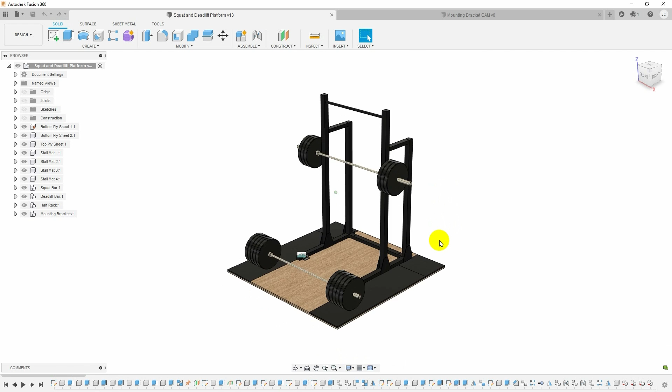I think everything in life worth doing starts with a CAD model, and that includes a squat rack and deadlift platform. So this is what I'm building, a Rogue half rack. I've got illustrations of a loaded squat bar and a loaded deadlift bar just to get an idea of how all this stuff was going to fit when designing the platform.

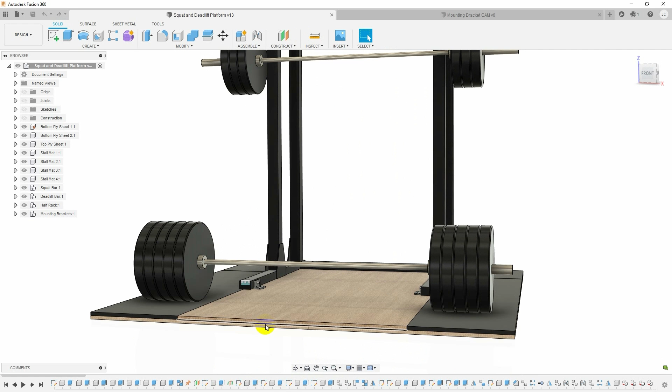The platform underneath consists of 3 sheets of 3/4 inch plywood: a couple sheets for the base, and a finished sheet to stand on that's 4 feet wide, with strips of horse stall mat on the sides to drop the deadlift on without damaging the floor. Gives it a little cushioning.

I'm going to be building this in the garage on the concrete floor, and all of this is going to be screwed together, but I need a way to anchor the squat rack down to the platform so it won't move when I walk out a heavy squat or rack a heavy bench. So I need a way to attach it to the floor.

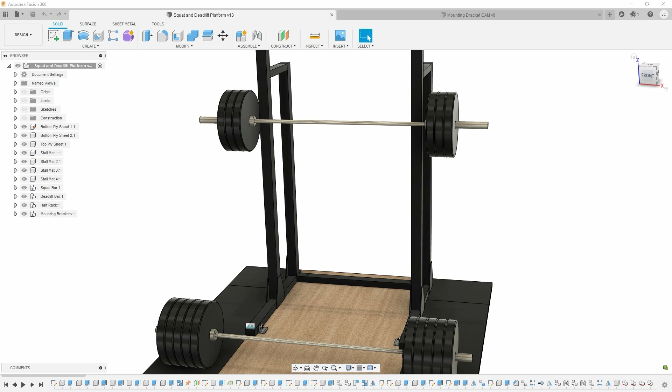Rogue actually makes a mounting foot, and this is the one they sell. It's just a piece of bent 3/16 steel that bolts into 2 of the holes using 5/8 bolts that bolt into the foot and provide a place to put in a concrete anchor.

But I'm not planning on anchoring this to the concrete. I'm planning on anchoring it down to the wood platform, which is only about 1.5 inches thick. I just can't imagine a 1/2 inch or 3/8 inch lag screw going into a 1.5 inch thick piece of wood - that doesn't seem viable. So I wanted to design my own foot that used an array of small wood screws to hold it down to the platform, and that's exactly what this is.

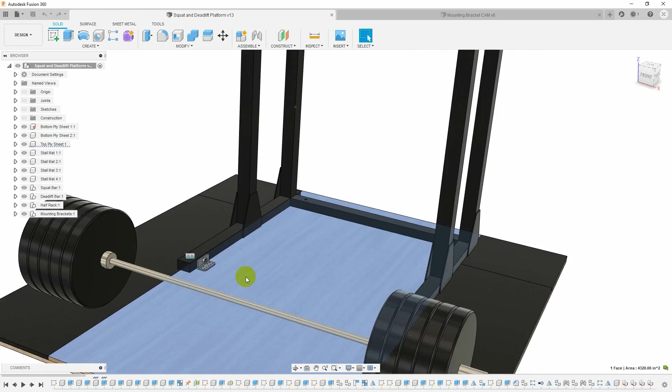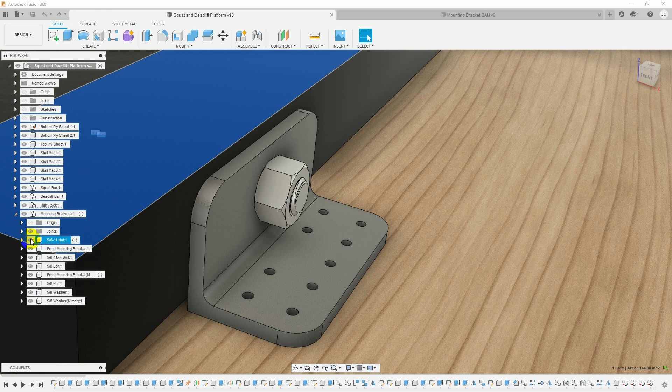This is a bracket I designed. It's got holes for a number of screws - I'll use 1.25 inch drywall screws to hold this bracket down to the platform. Then it'll bolt through one of the normal holes in the foot with a 5/8 bolt. If we hide the nut and bolt, you can get an idea of how this fits. It's made from a piece of 2-inch angle iron, or 2-inch angled aluminum, which is what I'm going to mill it out of.

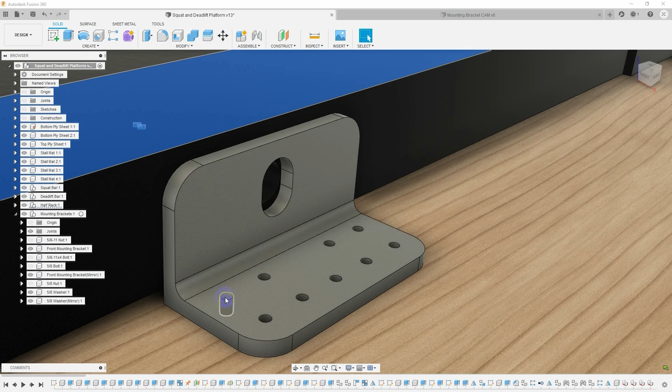It's already got this radius in it, and the bulk shape is there, so we don't have to hog out a bunch of material. We just need to cut a slot here because I don't know exactly how high this is going to be, and if you can't make something perfect, you make it adjustable. So I'm going to make the height adjustable, and then once it's bolted in place and flush with the ground, I'll drive in 9 screws to hold it.

To machine this, we're just going to need to pocket that out, do the perimeter, and then put it in a second setup to drill all the holes and contour around the other side. So I have a model here for the CAM, and this is going to be pretty straightforward.

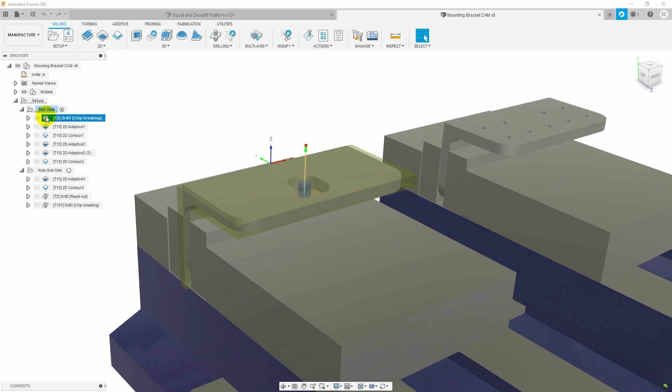Before I pocket out this slot, I want to go ahead and drill. Using this new spindle, I'm not that familiar with how a helical entry is going to work, so I'm going to use my spotting drill and put in a 1/4 inch hole first to make room, so there'll be less pressure on the helical entry, and we'll see how it goes.

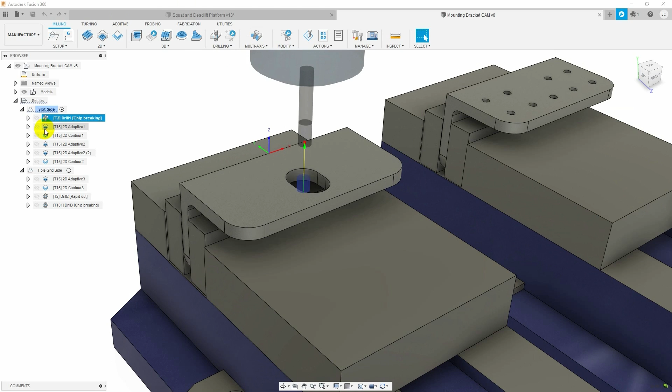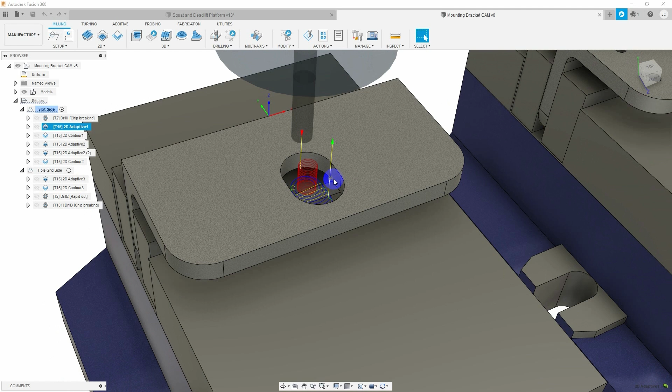Maybe in the long run I won't need to do that. We'll do a 2D adaptive with a helical entry. There's already a pre-drilled hole, and it will accelerate and hog out the rest of that material. This will be the first time we see this spindle running full speed, at 54 inches a minute at 12,000 RPM with a 3-flute cutter hogging out material. I'm hoping that's going to be pretty spectacular, but not too spectacular, if you know what I mean.

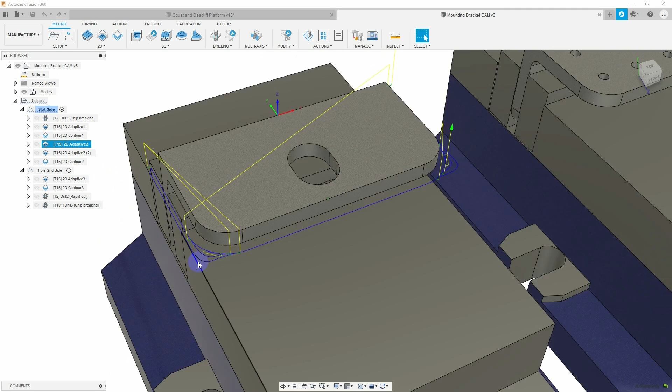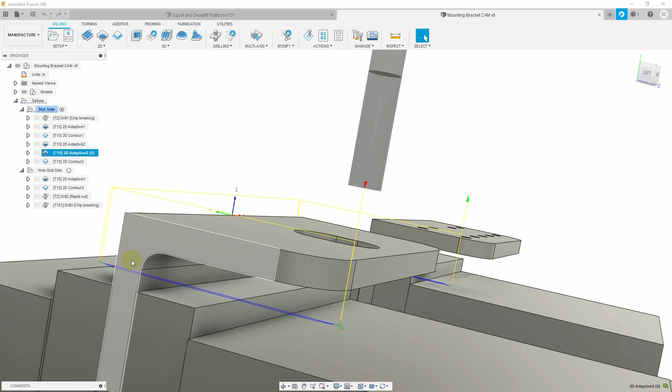Then there's a contour, because the adaptive is going to leave about 10 thou, and I'll do a contour to clean up any facets left from the adaptive clearing. Then we'll do an adaptive clearing operation on the outside, just coming through the quarter inch thickness, to contour it around. Then a second adaptive deeper, because the end mill is only meant to side mill down 1 diameter, and I want to go about 2 diameters so we take care of this filleted area and get it trimmed to width, so when we flip it around in the other setup we can just do 1 pass to clean up the other quarter inch thick flange. Then a final contour at full depth around the outside to smooth it out and clean it up.

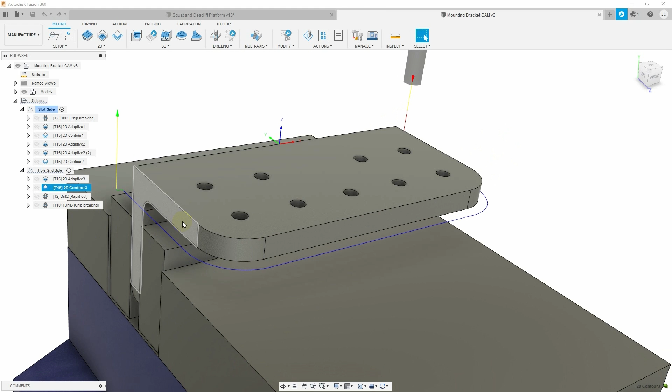Then we'll take that out, flip it over into a second setup, and do the same kind of adaptive operation, except we only need to do it at 1 depth because the rest has already been cleaned up. Then contour around the outside to clean that up, and I'll spot drill and drill all of the holes. Now I probably don't need to spot drill this because it's not that critical, but the tool changes are quick, so I'm going to go ahead and do it and just get some experience with this new spindle and how it behaves. I'll probably want some countersinks on the bottom side of this.

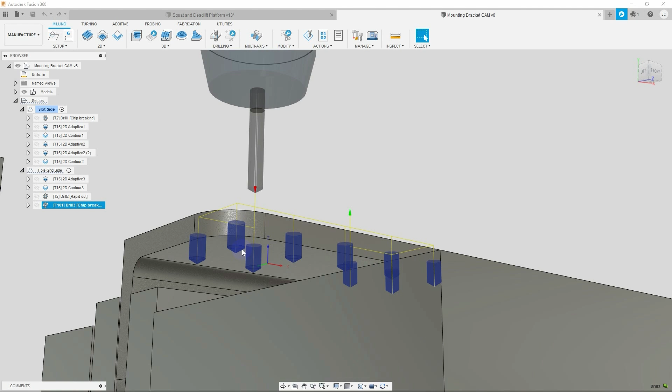I'm not going to try to mill those. I'll just run it over to the drill press and do those by hand. So I think that's it. Let's go out to the mill and see how this goes.

This is the material we're going to use. It's just a 2 inch by 2 inch piece of aluminum angle extruded with quarter inch thick sides.

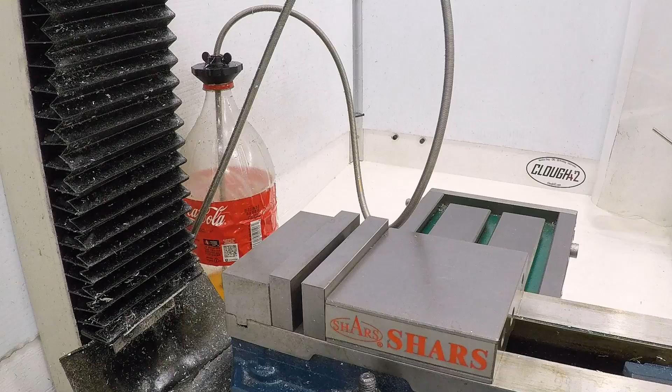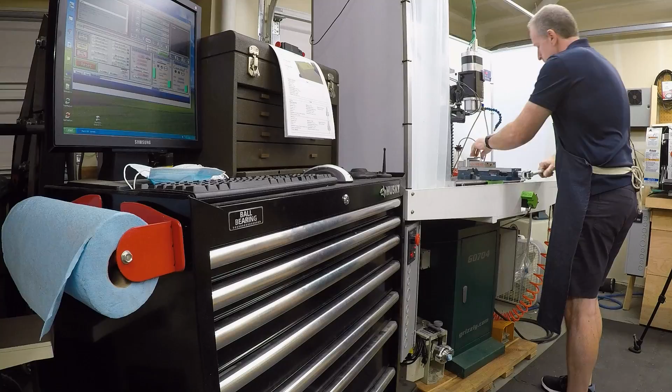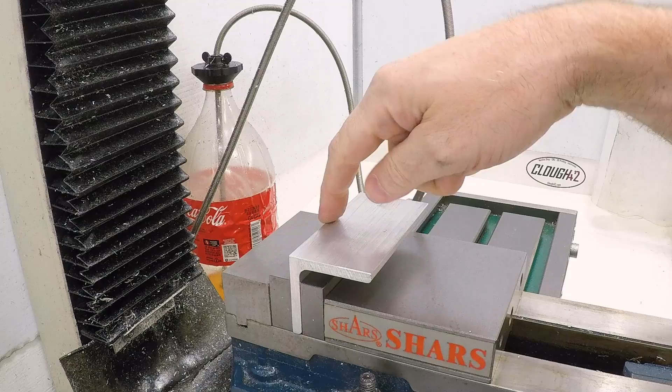I'll drop that in the vise, center it up, though it really doesn't matter, and clamp it down firmly. The first side we're going to do is the side that has the slot in it, but the first thing we need to do is zero up on this back edge of the part as shown in the setup sheet. And for that, we will need the Haimer.

Okay, according to the setup sheet, the first tool is going to be a spotting drill, tool 2. We're just going to use the spotting drill to create an opening for the helix entry. Do we really need to? Probably not, but I'm still getting the hang of this spindle and getting a feeling for what it can do, and I'd rather have a clearance hole just to make the entry easier.

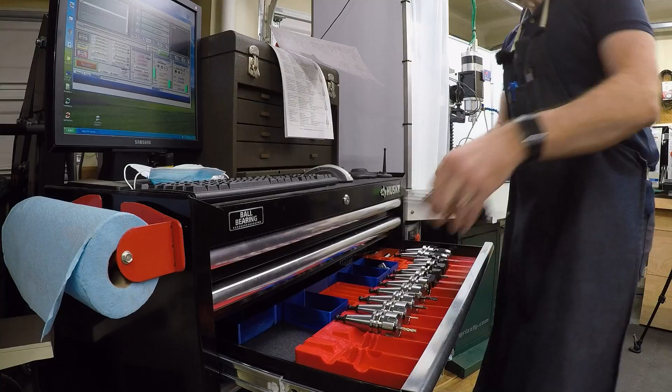Okay, and then the rest of this program is going to be tool 15, which is a 3-flute end mill. This is a Lakeshore Carbide quarter inch variable flute end mill coated for aluminum.

Now this thing is going to move really, really fast, and it's a little bit weakly supported because we're just dealing with the rigidity of the aluminum here. I think it's going to be okay for this particular cut, just because the loading is not that great. We're only taking 1.5 thou per tooth, and with this running at 12,000 RPM with the variable flute end mill, I think it's all going to even out and run pretty smoothly, even though we have a little bit of a lack of rigidity. But I guess we're going to find out. Let me close part of this. I can't close it completely or you won't be able to see, but I'm expecting just a snowstorm of aluminum from this.

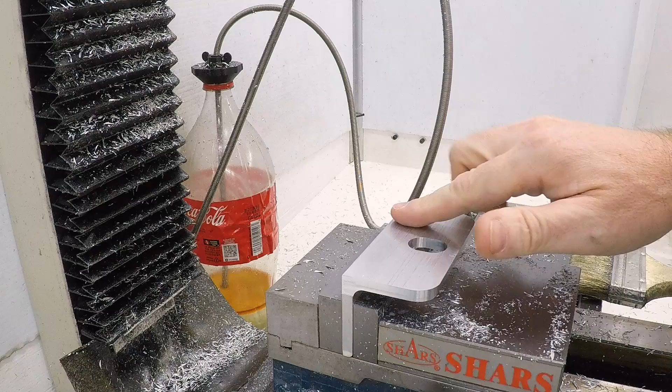Well, that went pretty well. The surface finish on that is very, very nice. And yes, there was a snowstorm of aluminum. Looks like I caught most of it inside the enclosure, but there's a little bit out here on the floor. It's okay, I'll vacuum it up later. It was worth it to get the shot.

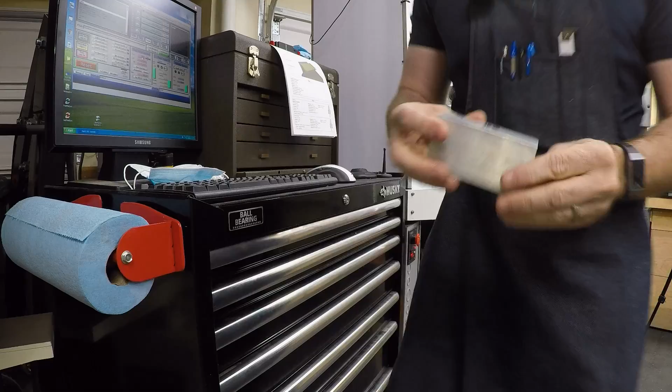Okay, that all came out nice and clean. I'm pretty happy with that. You can see we cleaned up this side all the way back to the base here and down, so we cleaned up that corner. So then when we flip it to do the drilling in this direction, it'll give us a nice place that we can indicate. Let me wipe the chips off this and knock off any burrs, and let's put this back in the vise.

Now we need exactly the same drill. Let me grab the Haimer and we'll find this back edge. We don't need to re-indicate the Y because that's controlled by the fixed jaw of the vise, but because we took the part out and put it back in, we will need to indicate the X, and I'll use these machine surfaces on the end to do that.

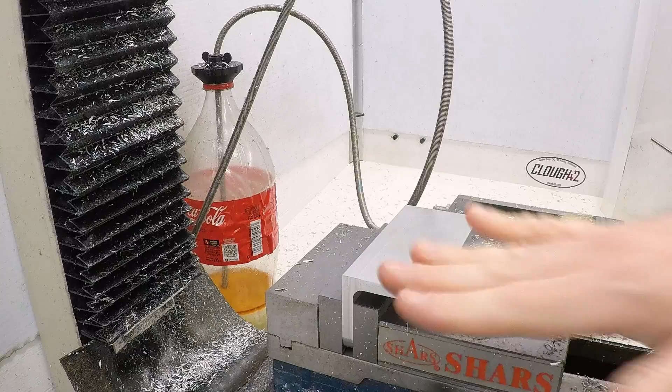And as long as I've got the Haimer in there, I'll go ahead and re-indicate Z. Should be exactly the same. No, it won't, because we took a little bit off of this front edge, which is now on the bottom of the vise, so the Z height will be a little bit different, even if you aren't accounting for the differences in the extrusion.

Yeah, and just out of curiosity, the Z0 I'm showing here is 0.0049. So we did take about 5 thou off of the other side of the part, which is why the Z is now about 5 thou lower.

Okay, the first operation is back to tool 15, to contour adaptive and contour the outside edge.

Next up is the spotting drill, to spot the holes.

And now finally a number 15 drill.

Get this drill out of the way so I don't cut myself on it. Of course, that's never happened before. And let's take a look at what we got.

Those look like holes. Got a little bit of an edge on here. Let's see, how do we do for alignment between the top and bottom, between the two setups? I can see the joint there. I can see this, the edge.

I can see when I came across this last time, I touched both surfaces. There is something there, might be a thou, might be two. It's hard to tell. And on this side, it's the other direction, and yeah, it's pretty similar, a thou or two, probably misalignment. That's not too bad. I can live with that on a part like this.

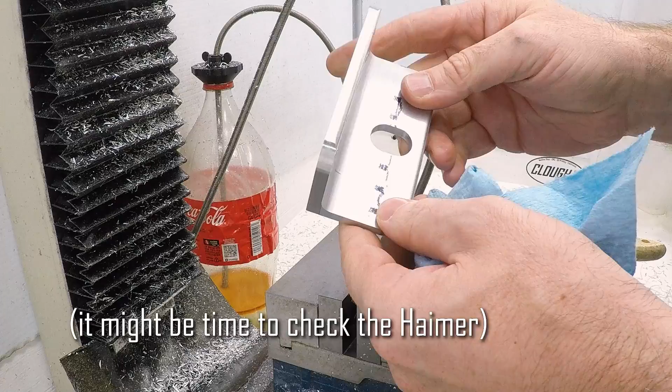If that were really critical, I would try to find a way to do more of the machining in a single setup.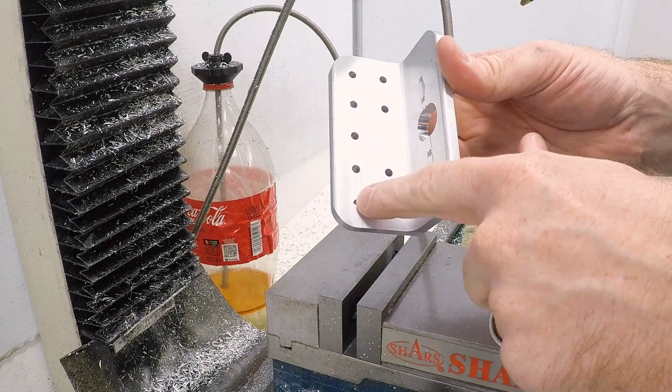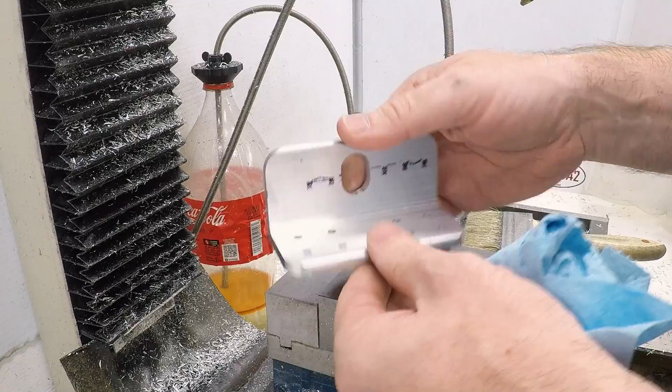Okay, so these have got some burrs on them, which is to be expected from drilling. I will take this over to the drill press and just use a countersink. I would do it here in the mill, but I don't have a quill anymore — I deleted the quill when I put this spindle on. So I'll just go over to the drill press with just a countersink and come in and clean up all these holes.

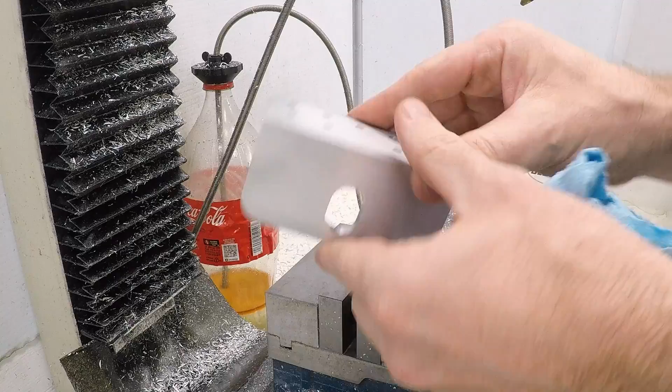And then I will brush the rest of this down with Scotch-Brite. I actually have a buffer that I haven't set up yet, and I'm looking forward to having that with a Scotch-Brite wheel — that would be great for this. But I'll just do this by hand, and we'll go put this on the rack and see how it works.

Well, this is the squat rack. I will apologize for the weird lighting over here. I have the lighting set up in the shop behind me, but I don't have the light set up over here in the gym yet.

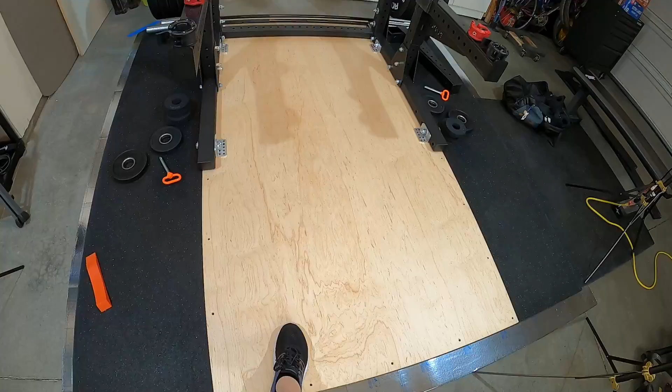So this is just a Rogue half rack, sitting on a platform that I showed the design of earlier. This is 3/4 inch ply with horse stall mats on the sides for deadlifting, and then there's a second layer of 3/4 inch plywood underneath it just for stability. The whole thing sits on a floating floor sub-layer, which is a 2mm foam with some insulation and vapor barrier.

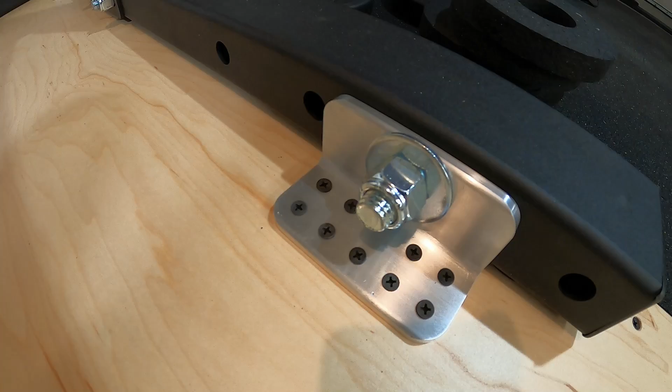And I've already got the feet installed here on the rack. You can see they're just attached to the rack leg with a 5/8 inch bolt through with a nylon lock nut and a washer. And then the screws that hold it down are these — just 1.25 inch drywall screws.

And there are 9 of them in each foot, just driven right down into the plywood, and that seems sufficient to hold it. The whole thing's held down with 4 feet — there's one there, one on the back, and then the same thing on the other side.

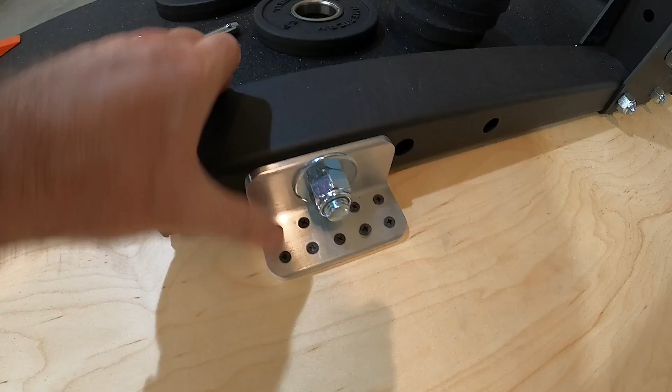And I'm pretty pleased with how these turned out. After hitting them with some Scotch-Brite, the edges are kind of soft, so if I'm ever out here squatting in bare feet, I'm not going to cut myself on them. It holds the squat rack down nice and solid — better than I expected, actually.

And that's the mounting foot. I've had a chance to use the rack a couple of times since I installed them, and I'm pretty happy with it. It seems nice and stable, so I think that is going to work.

I did run into one other problem when I was installing the rack down here on the wooden platform, but that will be the subject of a future video.